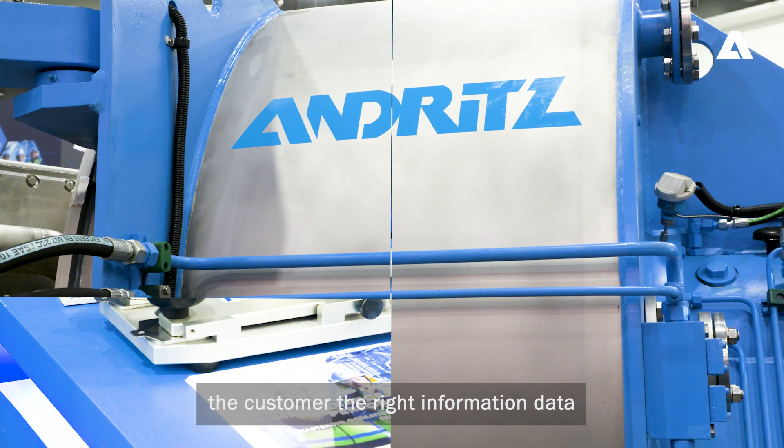ANDRITZ has been working and providing maintenance reliability solutions for over 35 years. Based on this experience, we can help in mining by integrating process, collecting data and information through the equipment, and providing customers the right information to make right decisions. So we are capable of offering customers the best solution they can have.

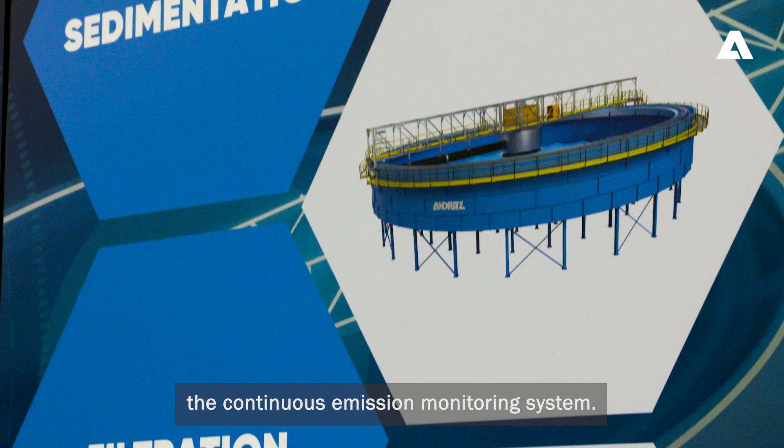ANDRITZ brings their knowledge to keep the system running reliably. We have a dedicated team on site taking care of the CEMS, the continuous emission monitoring system, making sure that you are producing under the legal requirements for your facility. This is what puts us on the market, keeping our business in partnership for over 25 years with customers in the mining industry.

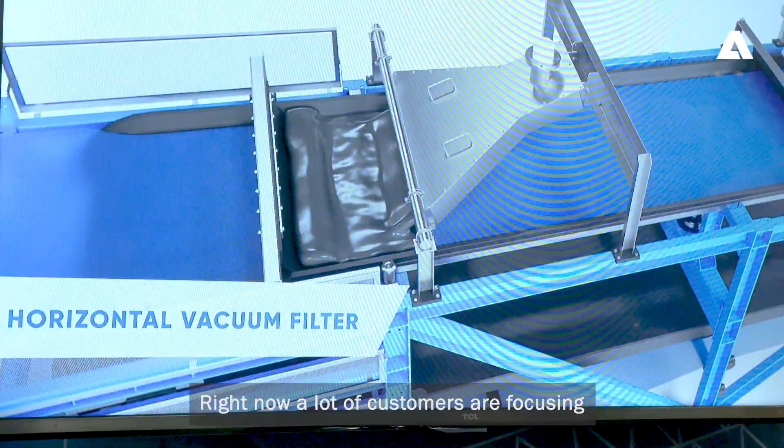Right now, a lot of customers are focusing on sustainability, caring about the environment, along with the benefits and economics of it. You need systems, you need technology, you need a platform to connect all of that together and utilize all that data. ANDRITZ has a long history delivering solutions in that area. Our Metris platform enables our customers to do so.

Recently, we also partnered with Microsoft, and they provide different platforms, basically for machine learning, for self-learning controls, for AI controls.

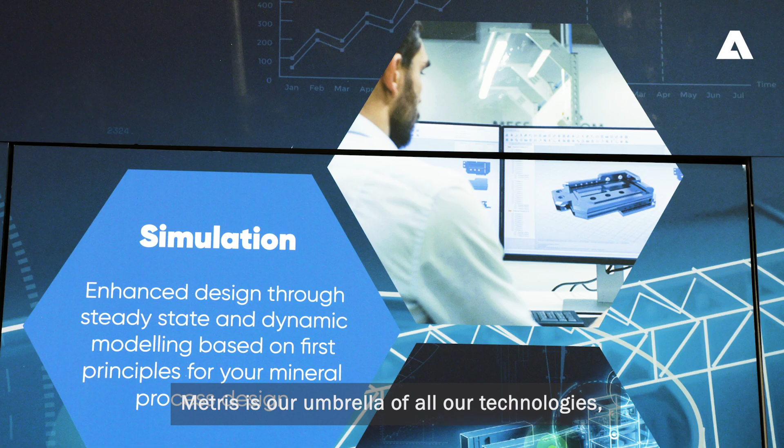Metris is our umbrella of all our technologies: simulation, digital twins, artificial intelligence, and real-time optimization, even cybersecurity. You can collect the data, analyze the data, and apply the data in real time for our advanced process control solution.

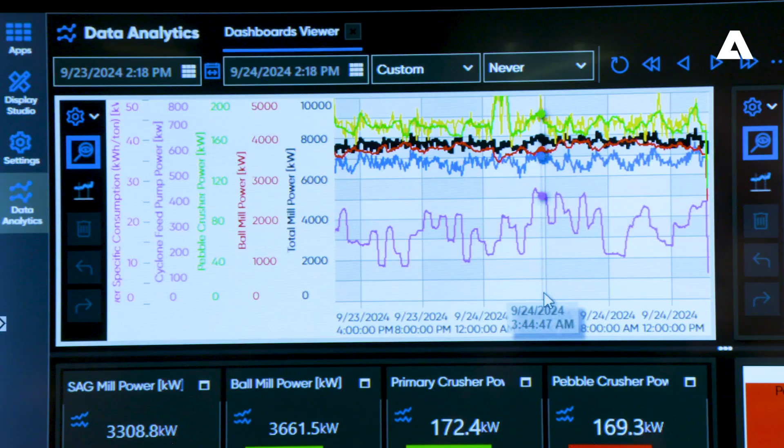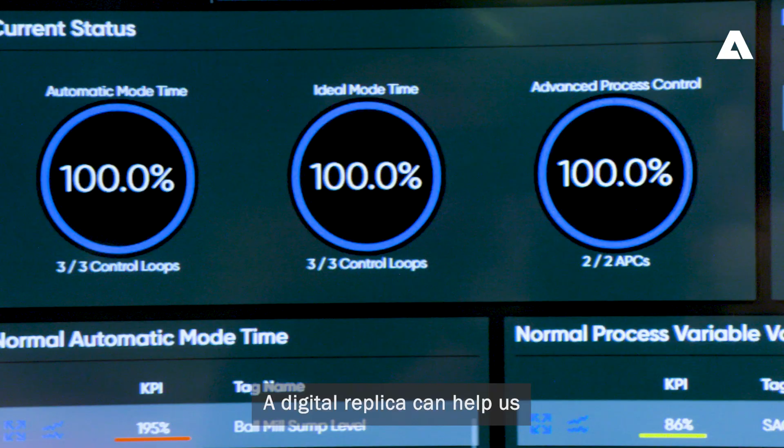In mining, it's quite difficult to have equipment for every single measurement, for every single data point we'd like to use for digital solutions. Digital twins, as the name says, is a replica of the current equipment or the complete area. A digital replica can help us just copy and paste those variables from the equipment. Maintenance can use that data, managers can use the data, and the control system can also use that data.

As operations become more invested in digital automation and systems, interconnecting devices and assets, they need to be protected through a high level of OT cybersecurity.

By adding autonomous or digitalization solutions, overall you're going to produce better, you're going to do it safer, and ultimately you're going to produce more capital for your operation and for your company.

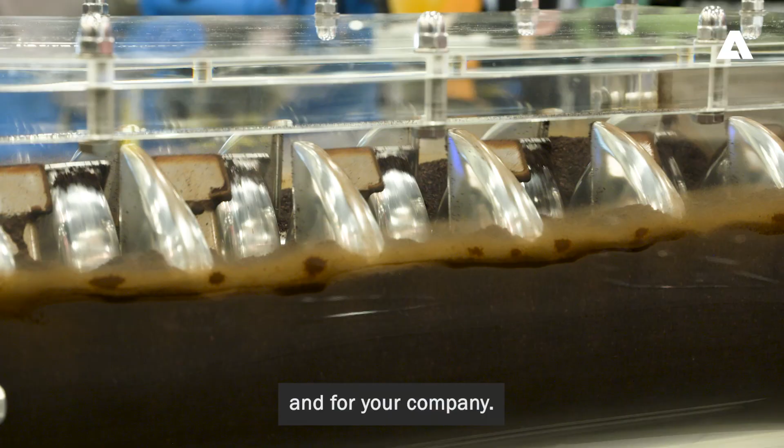ANDRITZ believes that technology must be fit for purpose, to provide value for assets, people, and the environment. So we want to know your challenge, and we do have the technology ready to help make mining better.